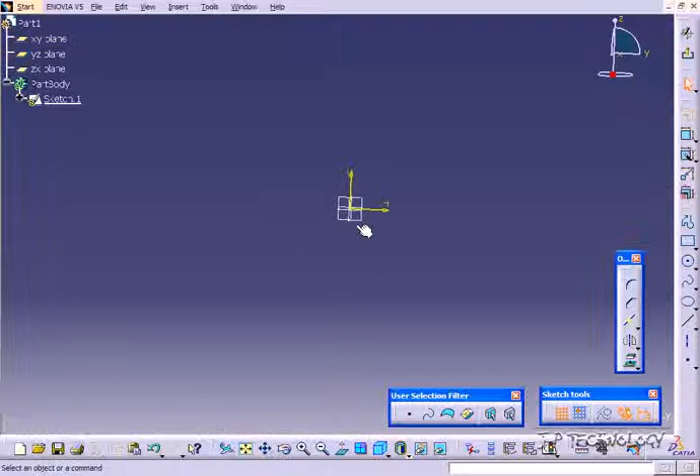In the last tutorial, we went over the symmetry sketch feature, and the mirror sketch feature works exactly the same, except that it keeps both sides of the sketch. In the symmetry sketch, we would only keep one side; using the mirror sketch, you get to keep both sides. This would be used when the sketch is too complicated to duplicate on the other side of the mirror. So with the mirror feature, you're able to create a sketch, mirror it, and have the opposite, so you have both of them going at the same time.

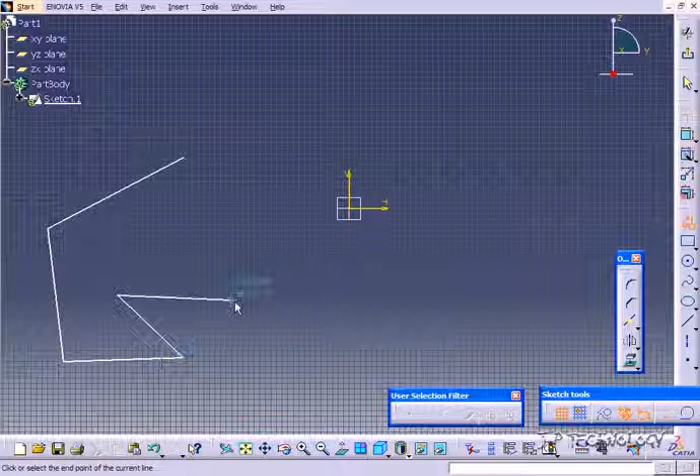So we're going to do a few examples. I'm going to sketch out a little profile on the side here, and I'm going to draw a line down the middle as our axis. We're going to change this to a construction geometry, just so that when we go to extrude it or do any features, we don't have to worry about this line.

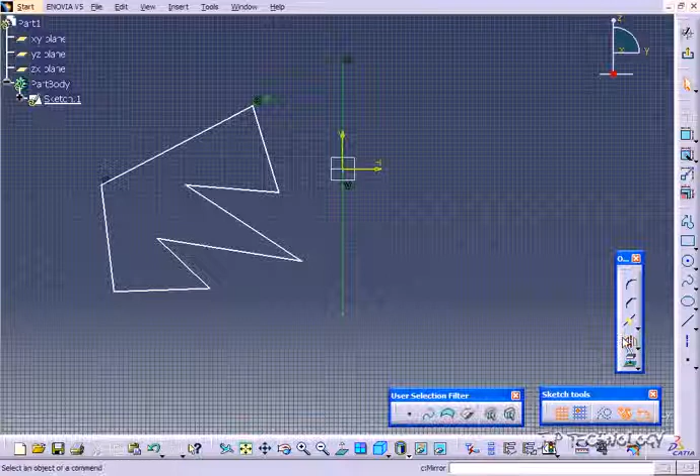The mirror feature is found right here in this toolbar, that's the mirror feature. You can also find it if you go to Insert, Operations, Transformation, and Mirror. So what we're going to do is mirror this entire part, this entire sketch, onto this side. We'll highlight the entire sketch, click mirror, click the center line, and we've mirrored it onto the other side. Now let's press Ctrl Z, and we can actually mirror one part of the sketch at a time.

Let's click this line here, click mirror, click the center line, and we've mirrored that line. Now we can slowly build each of these parts. So let's click this line, press Control and click this line, click mirror, click the center line, and we've thrown that line over too. So you can do one line or you can do multiple lines, and you can slowly toss each of those lines over.

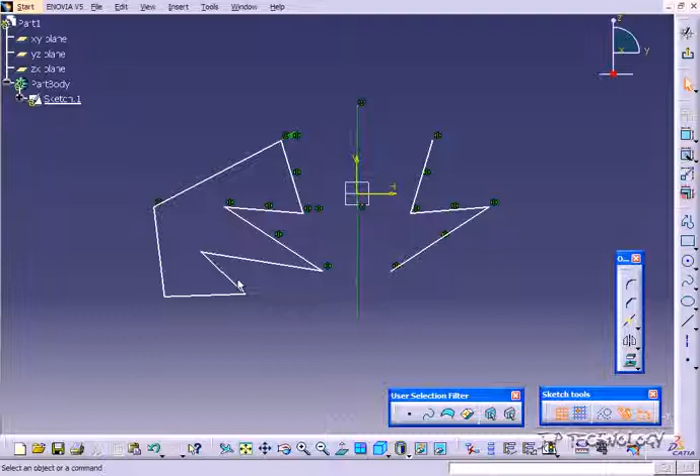Say that we only wanted those 3 lines, and then we were going to change the profile a little bit for this side - you're able to do that. So both of these guys have the same little unique feature here, and then we're able to change the profile.

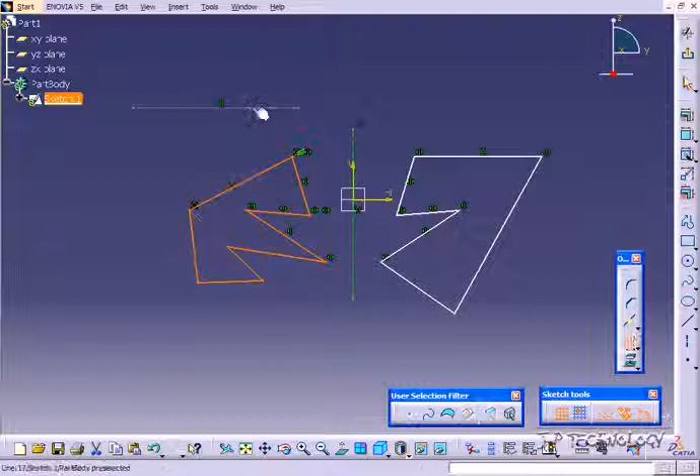Now we're also able to do the up and down, so let's draw a line across, and we'll make it a construction line again, and we'll throw this entire sketch above it. So let's click mirror, click this line, and the entire sketch is thrown above.

Press Ctrl Z and go back, and this time let's highlight this entire sketch, press Ctrl and highlight this entire sketch too, and let's throw both of them above this line. So we'll click mirror, click this line, and we've thrown both of them above.

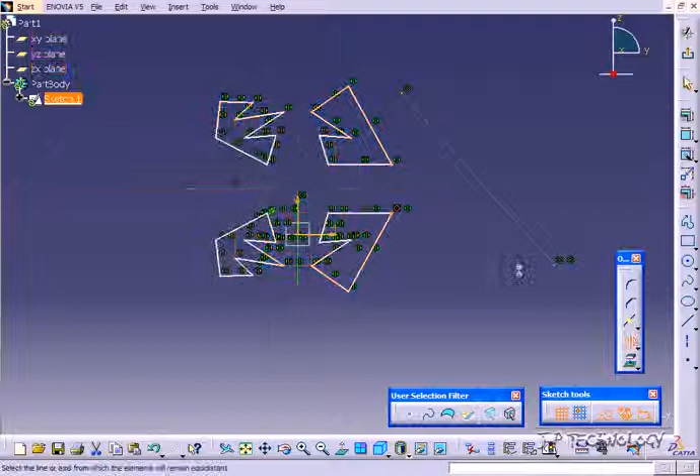You're also able to do it across a line that isn't up and down, but actually on an angle. So we'll turn this line into a construction line, highlight all of these sketches here, and throw it on top over there. We'll click mirror, click this line, and we've mirrored all of those sketches over there.

So using this feature, you're able to go from this one sketch that we had here to making, by the end, 8 different sketches. Using this mirror option, you're able to make a left-hand or right-hand component, and either carry along certain features of that one component to the other side or change the profile. This is a very powerful tool - it allows you to create one sketch and duplicate it in different ways. This will save you a lot of time and help you become more efficient when creating left-hand components, right-hand components, and symmetrically opposite components.

And this concludes our tutorial on the mirror sketch feature within Catia V5.